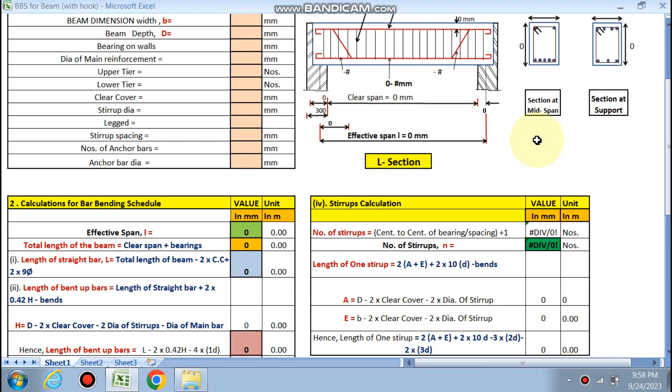So in this case you need to put your data in these cells. The length of the straight bar will be calculated as the total beam length minus 2 clear cover from both sides plus 2 times 9 phi, because the hook is at 180 degrees. The length of the bent up bar uses the same formula, length of straight bar plus 2 into the bent up portion, since these are the bent up bars here.

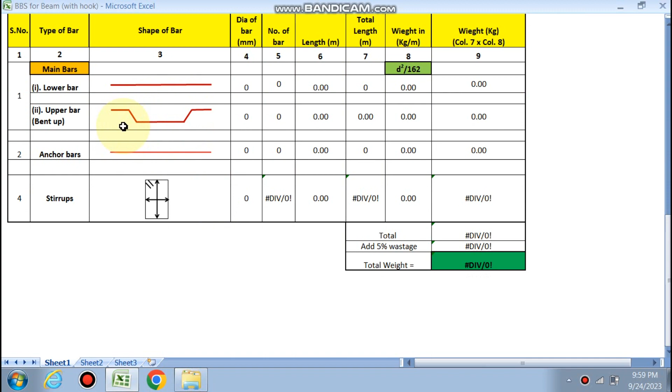Now the bar bending schedule will be calculated. Let's start: 3.5 meter is the clear span, beam depth is 220 by 300 mm, and bearing on the walls is 200 mm.

Dia of the main reinforcement is 12 mm, with upper tier 2 and lower tier 3, so total 5 numbers of bar of 12 mm dia. Clear cover is 20 mm. Stirrup dia is 8 mm, 6 mm in this case, 2 legged stirrups with stirrup spacing of 200 mm. Number of anchor bars is 2 and anchor bar dia is 10 mm.

Right, we have put in all our data. Now you can see that the L section is being drawn in this Excel sheet.

Section at the mid span: if you cut this beam at the mid span, you will find 5 bars at the bottom and 2 anchor bars at the top. At the support there will be 4 bars, because 2 bars will be bent up at L by 7 of the support, 530 mm, and 2 already anchor bars are there, so additional hook is there at the 4 bars.

You can see the effective length is 3700. Clear span is 3.5 meter because the bearing is 200 mm on each side, so half the bearing, that is 100 mm from this side and 100 mm from this side, adds up to a total effective length of 3700.

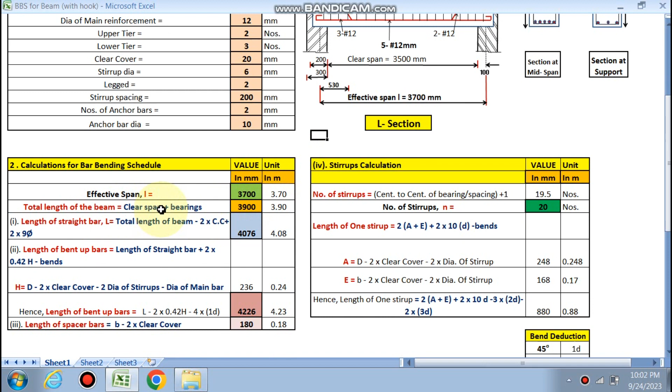Total length of the beam is clear span plus bearing. Length of the straight bar is total length of the beam minus 2 clear cover from both sides, minus 2 into 20, plus 2 times 9 phi for the hook. If the hook is bent at 180 degrees, then 9 phi from this side and from this side also. So the overall length of the straight bar, the cutting length, comes out to 4.08.

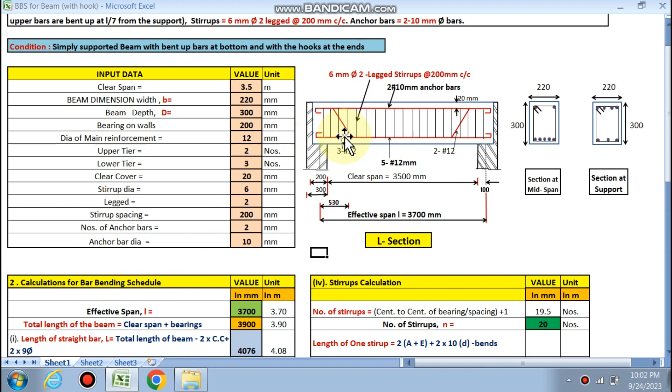Length of the bent up bar uses the same formula: length of straight bar plus 2 into 0.42h, minus bend deduction. H is the overall depth, 300 mm, minus 2 clear cover, minus 2 dia of the stirrups from both ends, and minus dia of the main bar.

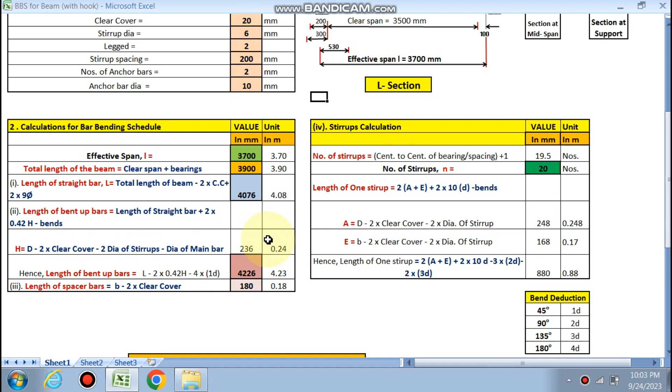So 0.236 is the h value that comes out. Length of the bent up bar by this formula includes a bend deduction - 4 times into 1d for 45 degree bend, 1d deduction per bend. There are 4 bends in total (1, 2, 3, and 4), so the length of the bent up bar is calculated accordingly.

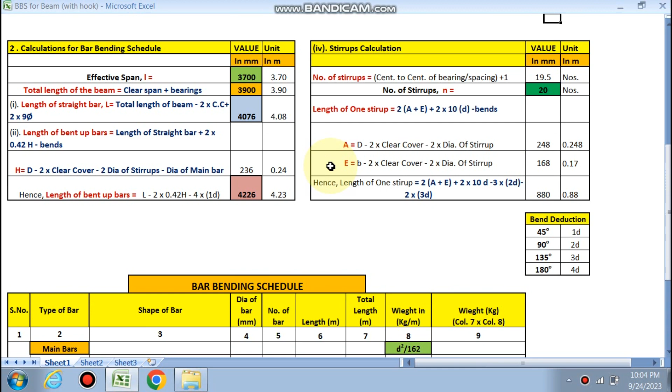Number of stirrups calculation: 20 numbers are required, and the length of one stirrup is 0.88. Now for the lower bar, 12 mm dia, 3 numbers of bar, 4.08 is the length of the straight bar. Total length, weight in kg per meter, and finally total weight are calculated.

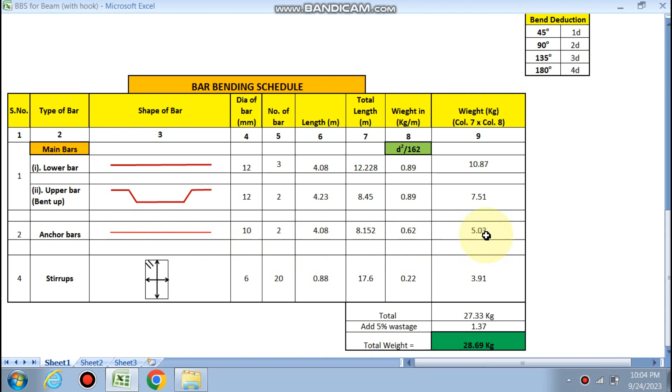Bent up bar again, 12 mm dia, 2 numbers are bent up, and the total length is calculated. Finally the total weight for the anchor bar is calculated, and for the stirrups, 20 numbers with length 0.88 each. Now you can see all the weight is calculated and finally we add 5% wastage.

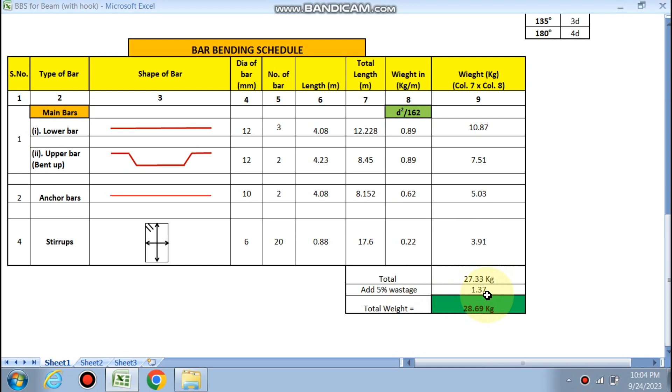So total weight comes out to be 28.69. You can change these values to get different results according to your requirement.

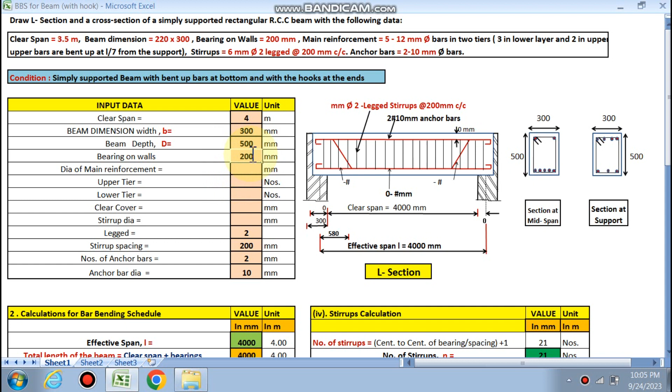If this is 4 meter and this is 300 mm by 500 mm, bearing on the walls is 200. Main reinforcement dia is 25 mm, assume. Upper tier going 3 numbers and lower tier also 3 numbers, suppose. Clear cover 20 mm and stirrup dia is suppose 8 mm.

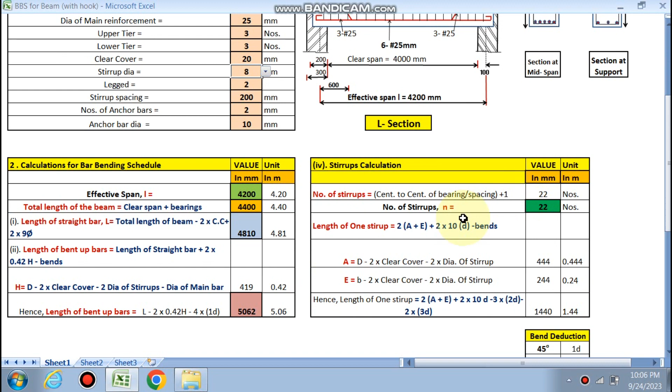So you can see all the L section is calculated, support width calculated, number of stirrups calculated, length of the straight bar and length of the bent up bars calculated, and finally the bar bending schedule shows 139 kg is required.